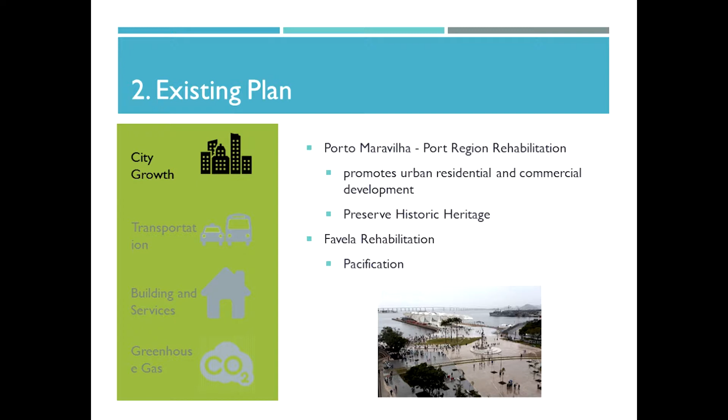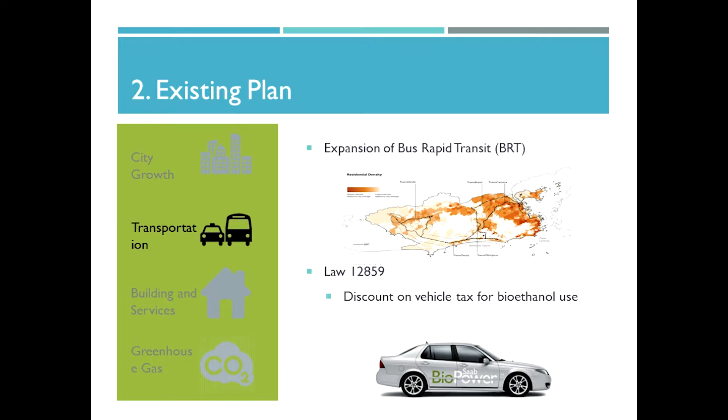In terms of transportation, there's an initiative for expanding the current Bus Rapid Transit, or BRT, system, providing greater connectivity citywide and offering a lower cost, more affordable way of public transit, along with Law 12859, which provides incentives for discounts on vehicle tax when they run on biofuel.

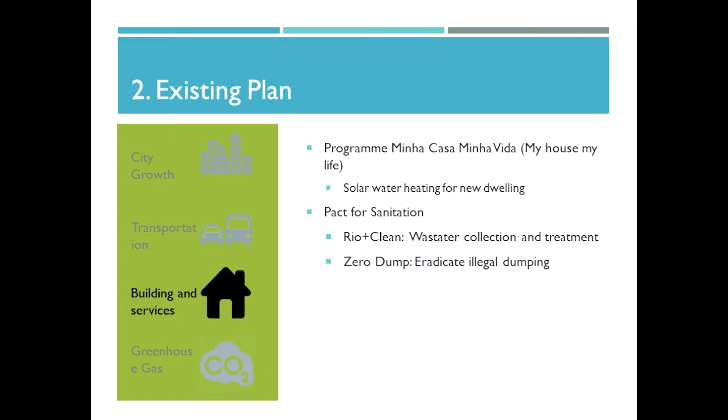In terms of buildings and services, by services I mean essential services such as water, wastewater, and solid waste collection. There's the initiative My House, My Life, which proposes solar water heating for new buildings, especially in favelas, and also Pact for Sanitation, including waste collection, along with eradicating illegal dumping of solid waste.

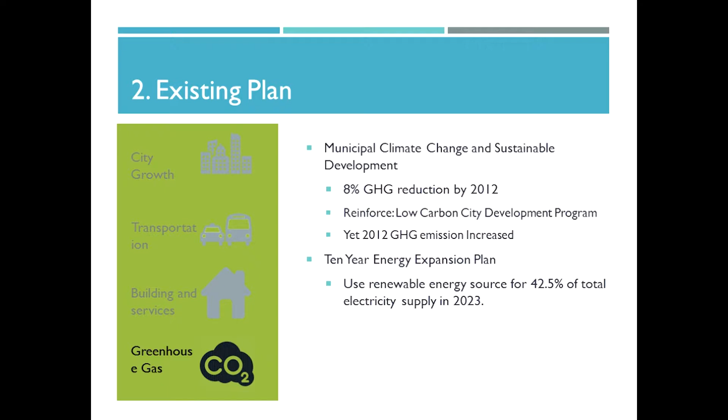Lastly, for GHG emissions, there's an initiative brought by the Municipal Climate Change and Sustainable Development policy, where an 8% GHG reduction was to be achieved by 2012. 2012 has passed, and we've seen an actual increase in GHG emissions, which doubts the effectiveness of this plan, along with the 10-year energy expansion plan, which signs agreements with renewable energy sources and developers.

Now it's our turn. We're going to talk a little bit more about our vision for 2050.

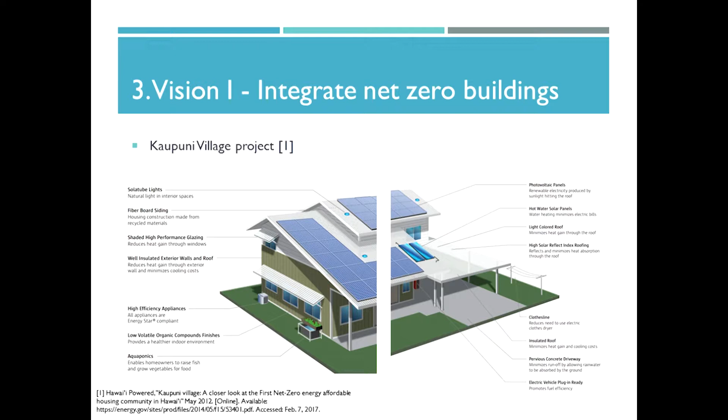Vision one is to integrate net zero buildings, inspired by Hawaii's first net zero building, which received LEED Platinum.

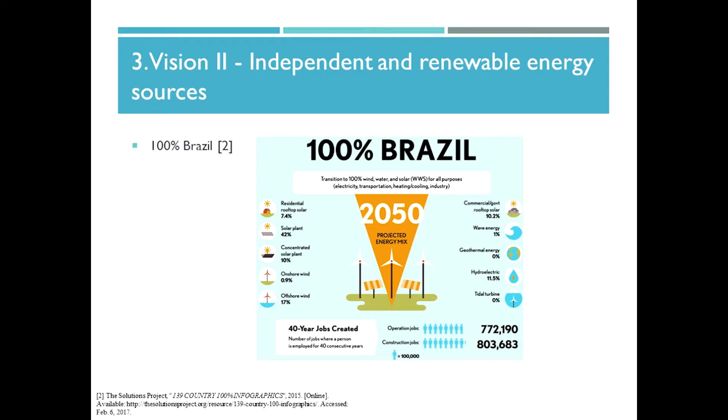The second is independent renewable energy sources, inspired by 100% Brazil, which transfers all energy supply systems to renewable. We're using this as inspiration, but we have our own renewable energy planning.

The third is full public transit coverage and mobility, as inspired by the car-free city concept in Chengdu, China.

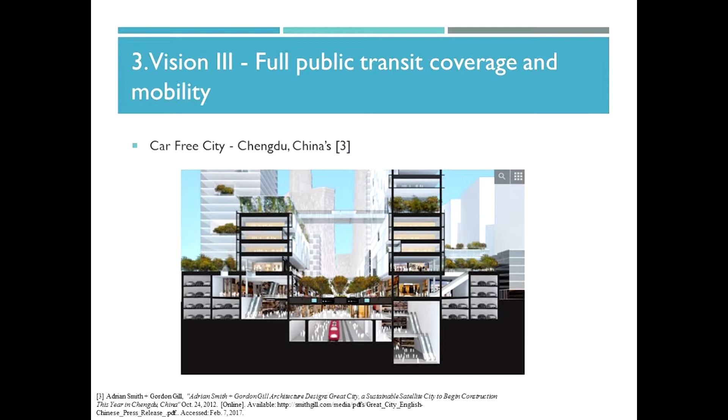And the last is to complete waste collection and treatment. So in order to justify our vision, we have infrastructure designs.

The first is the building design. We've proposed both retrofitting and new buildings for both favelas and urban formal developments. They're mostly similar, although there are some differences for retrofitting and new buildings in terms of appliances, which I'll dig into in more detail.

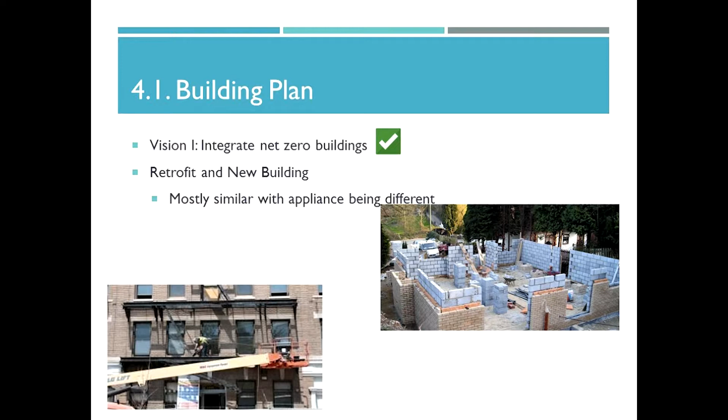We're going to start from top to bottom. In terms of roofing, formal developments will have ventilated building-integrated photovoltaic systems, or BIPV, which will achieve 70% electricity supply.

Those formal developments are often composed of high-rises, so that's where the 70% comes from. Informal developments, which are almost low to mid-rises, will also have BIPV systems that supply 100% of electricity for use, along with a lightweight green roof.

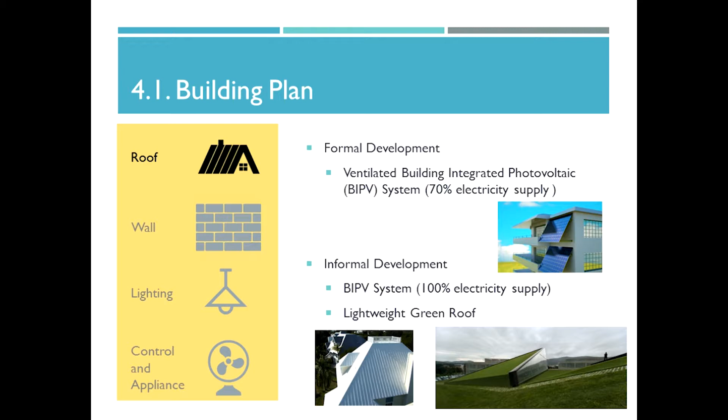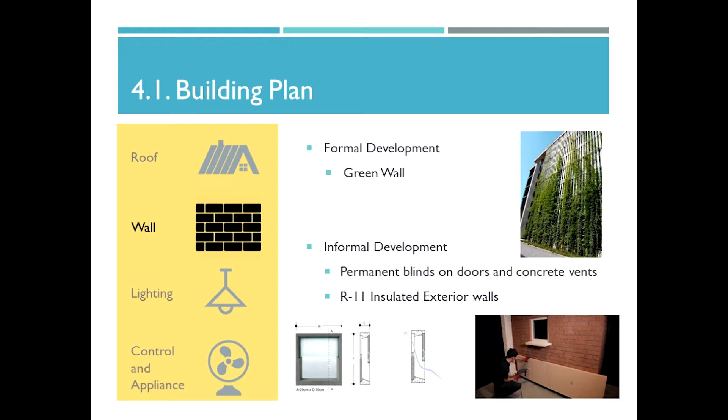In terms of walls, formal development will have green walls on the sides, along with informal development, which will have permanent blinds on doors and concrete vents, along with insulated exterior walls.

In terms of lighting, formal development will have external lighting shelves, which are adjustable, customized double glazed windows with adjustable blinds, and LED lights with sensors such as motion and sound. For informal settlements, we are going to propose Solatube lights.

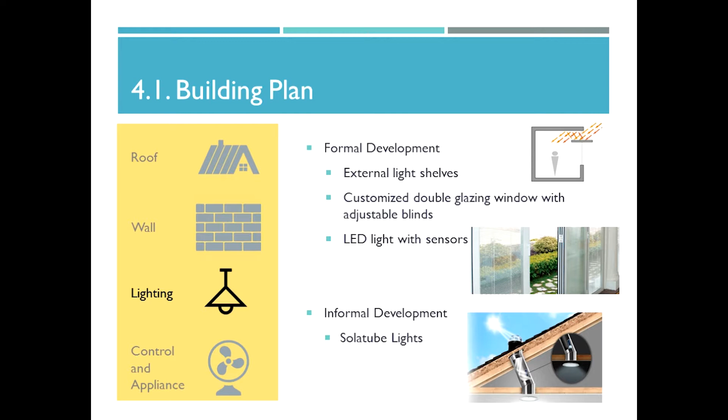For controls and appliances, in terms of climate control, there are some differences between retrofit and new buildings. The similarity is that the Nest Learning thermostat will be implemented for all, since even for retrofitting it's an easy replacement of your conventional thermostat. However, for retrofit it's a simple monitoring system using current appliances, whereas for new buildings, Energy Star appliances with smart control, timer, and electrical car charging system will be implemented.

We believe that if we plan to retrofit existing buildings with smart control appliances, those appliances already function well, so we don't want to generate waste. It's also going to be costly.

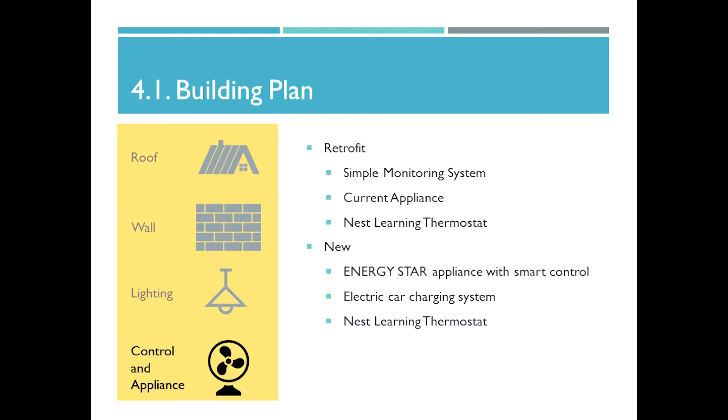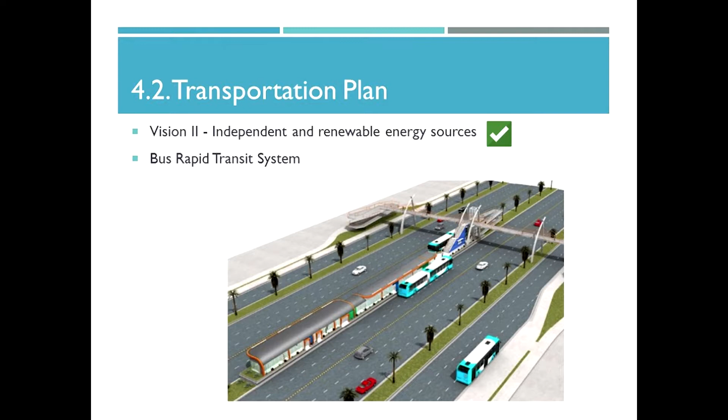Next, we'll dive into the transportation plan, where, as mentioned, the bus rapid transit (BRT) system will be more predominant for the city's public transit. This is the bird's eye view of a typical BRT system. We identified that this northern section does not have full connectivity, so we're proposing a BRT line across this section.

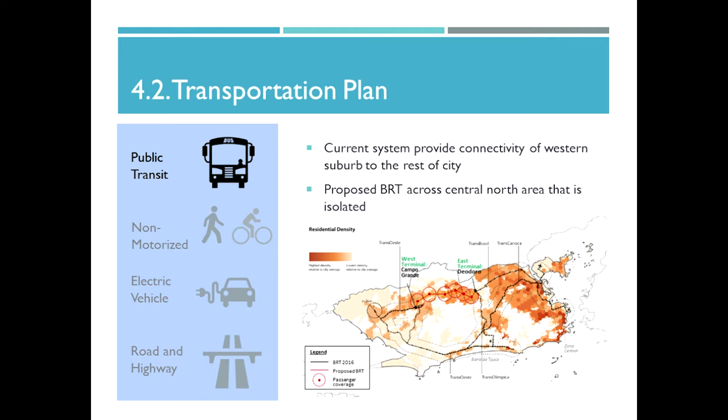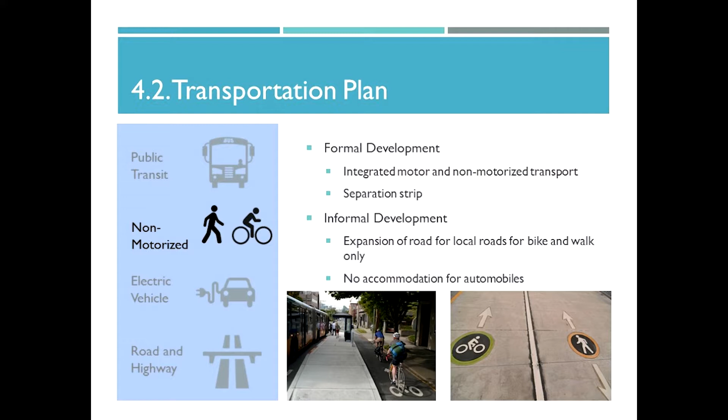In terms of non-motorized travel, which includes biking and walking, in formal development we will integrate motorized and non-motorized transport with the BRT system, along with a separation strip. For informal development, expansion of local roads in neighborhoods will be composed of bike and walking paths only. We'll talk more about this in the neighborhood design.

For cars, we propose that by 2050 all personal cars will be electric only. Several initiatives are being proposed to facilitate this transition: electric vehicle bylaws, where right now there are vehicle tax incentives for biofuels, now being applied to electric vehicles, along with special labeling, parking privileges, high occupancy vehicle lane access for green vehicles, and charging rebates.

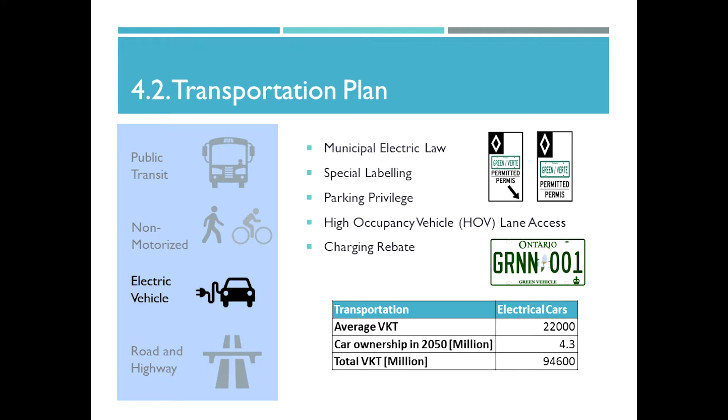We believe that with the implementation of HOV lanes, along with the connectivity we're offering through the BRT system, car ownership will decrease from 5.1 million to 4.3 million, whereas the total vehicle kilometers traveled (VKT) is 94,600 million.

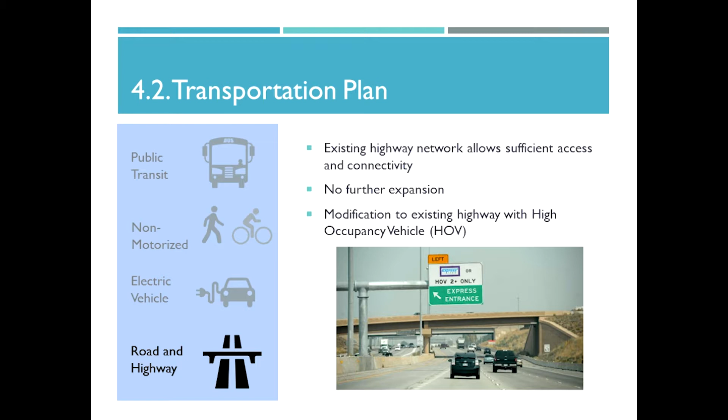In terms of roads and highways, we believe the current system allows sufficient access and connectivity for highway and local roads, so no further expansion is required, since we don't want to cause deforestation. But we do have some modifications for existing highways by implementing HOV lanes.

This will finish us off with the infrastructure design, starting with the energy plan.

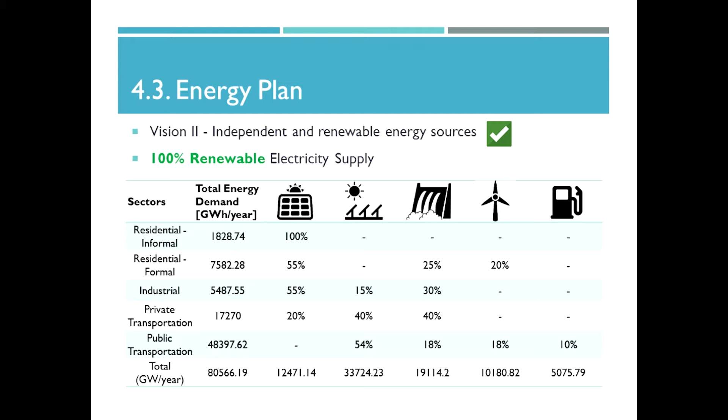For the energy sector, we are aiming to achieve 100% renewable electricity supply, achieved by implementing the PV system, solar microgrid, hydropower supply from the national grid, and offshore wind turbines. Now I'm going to talk in detail by sector.

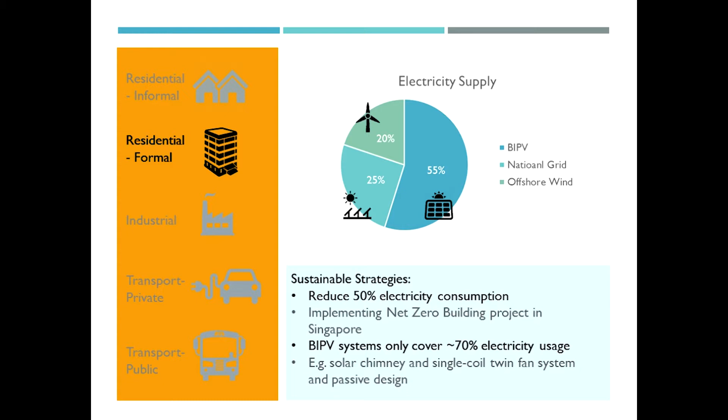For the residential sector, for informal houses, 100% will be supplied by the PV system. For formal houses, the high-rises, with our goal to reduce electricity consumption by 50%, we are going to use the PV system to cover 70% of the electricity supply, along with the solar microgrid. For high-rises along the coastline, we are going to use offshore wind turbines to supply electricity.

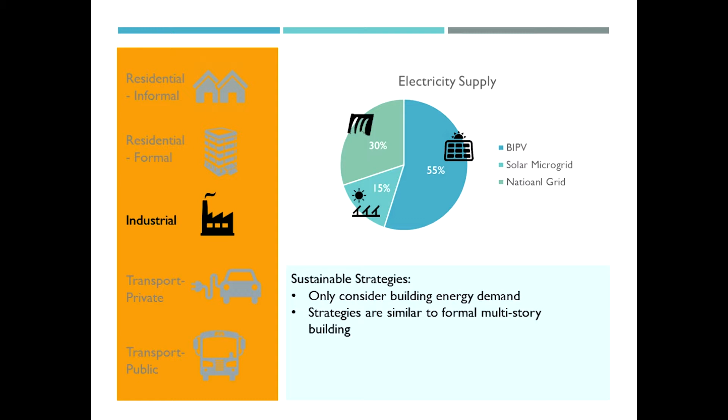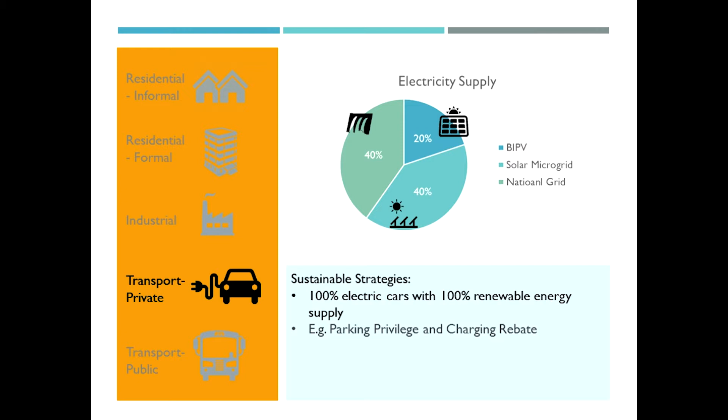For the industrial sector, we only focus on building electricity demand, with a strategy similar to our high-rises. For the private transportation sector, we are going to use a battery system, with charging stations at houses to supply electricity, and the rest will be equally supplied by the solar microgrid and hydropower. For the public transit system, about 55% will be supplied by the solar microgrid, installed around all BRT and subway terminals, with the rest supplied by hydropower as well as offshore wind turbines.

You may notice 10% of energy is supplied by diesel fuel. This is because our public transit demand increased significantly, so we had to introduce some conventional bi-articulated buses into our transportation plan.

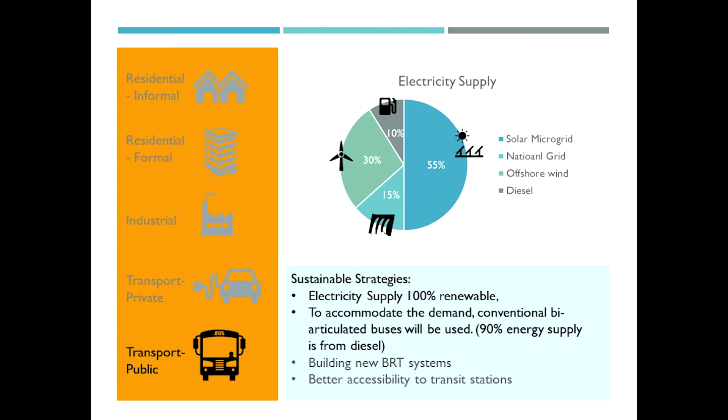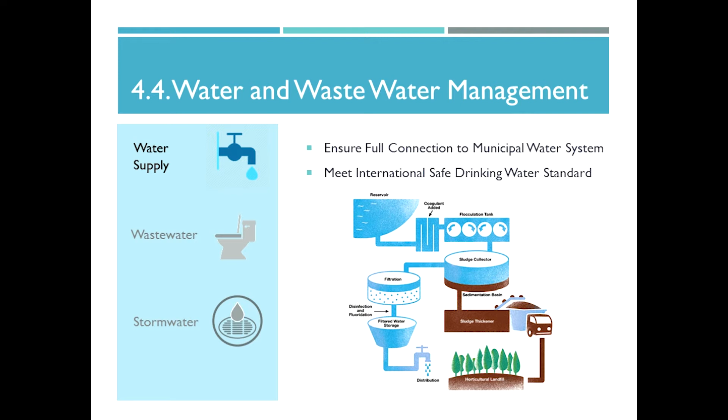Now I'm going to talk about the water and wastewater management plan. For water supply, we are going to ensure full connection to the municipal water system, especially for favelas, and also meet international drinking water standards. To achieve that, we are going to install conventional water treatment plants around the city.

For the wastewater plan, the first goal is to achieve full collection and treatment, which will be achieved by installing a gravity wastewater system that uses real geographic features.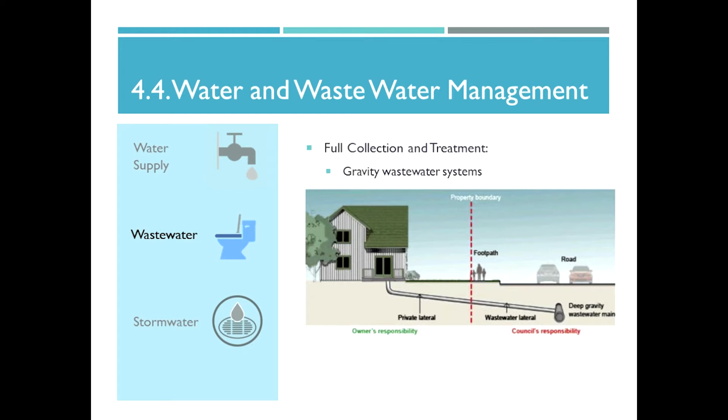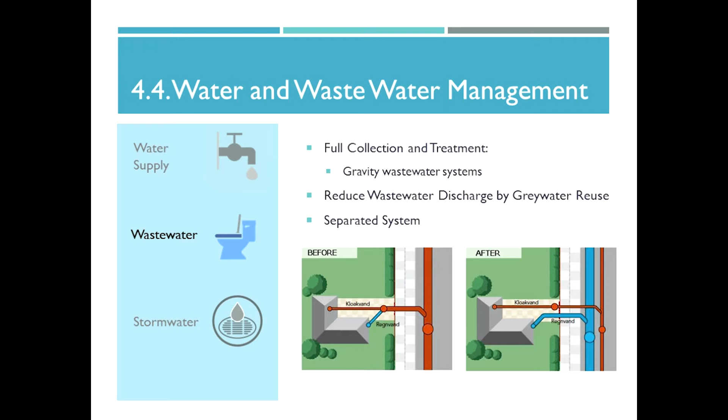We are also going to reduce wastewater discharge by installing greywater reuse systems for each household. And since the current system is a combined system, we are going to upgrade it to a separate system in order to separate sewer and stormwater discharge.

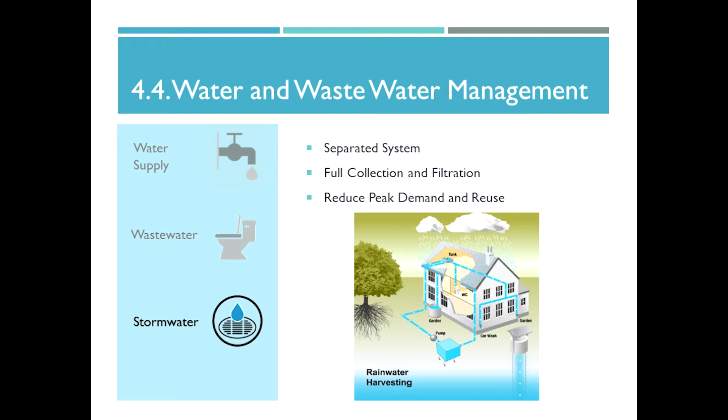For stormwater, other than the separated system, we are also going to do full collection and filtration. And in order to reduce peak demand during heavy rainfalls, we are going to introduce rainwater harvesting for all the low-rise and mid-rise buildings.

In terms of solid waste management, the first thing we are going to achieve is full collection. Especially for favelas, we are going to use our own innovative design. This is a normal garbage cart, but this is our design.

Normally it only has one opening, but with our design we allow residents in the household to separate their garbage into garbage, organic, and recycling. Then they can push their cart to the larger garbage bin.

We are also going to reduce landfill of solid waste by 50%. This is going to be achieved by 25% organic waste reuse, and also 25% recycling.

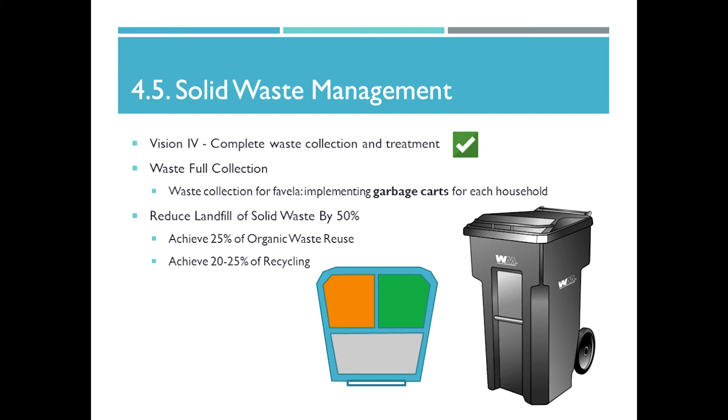For recycling, we are going to introduce an automatic sorting system at the treatment plant, but also push public education.

Now that you know about our infrastructure design, I'm going to talk about the land use and neighborhood design. For land use, we are going to follow the definition of a good city introduced by Kevin Lynch: open, accessible, decentralized, diverse, adaptable, and tolerant to experiment.

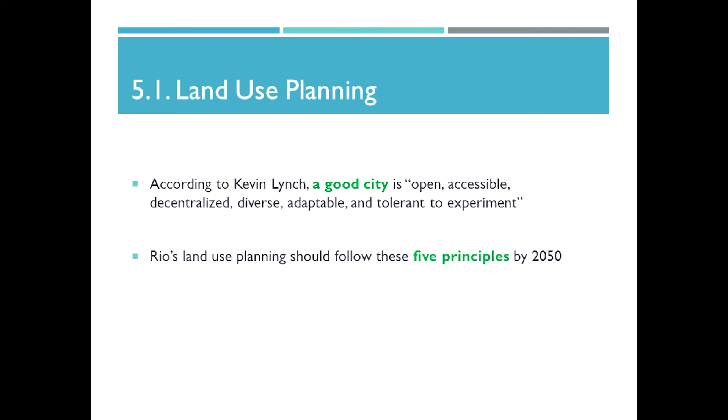This is going to be achieved by 5 principles. The first is to increase open spaces, achieved by setting a canopy coverage goal at 40%. The second is to encourage mixed land use, especially for the favelas.

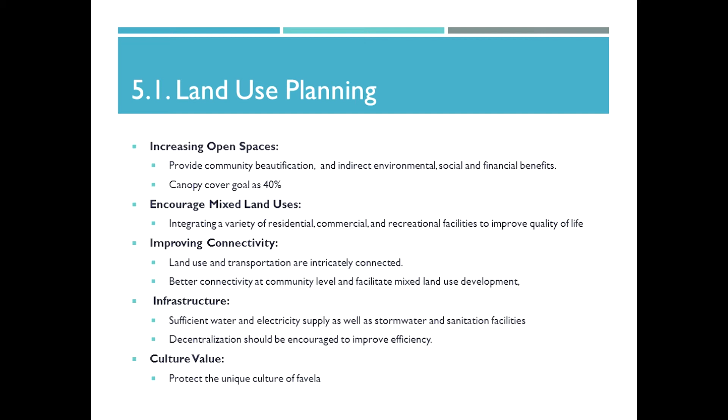We are also going to improve connectivity through our transportation plan and by providing sufficient infrastructure. The last principle is to protect the cultural value of Rio, especially protecting favelas, since they have become tourism attractions in recent years.

For neighborhood design in informal areas, in order to achieve our waste collection management plan, we are going to have 2 types of roads. The first is called the collector road, about 12 meters wide, allowing cars, trucks, bikes, and pedestrians to travel.

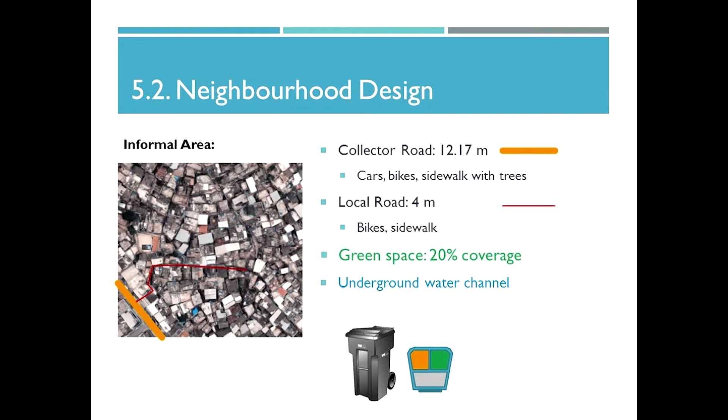The local roads will be widened to 4 meters, allowing bikes and pedestrians to travel. Green space coverage will be about 20%, and our stormwater management plan will be achieved by underground water channels. For the formal area, we also have roads.

For the collector road in the formal area, it will be about 30 meters wide, with a BRT in the middle of the cross section, and it can also be traveled by cars, bikes, and pedestrians. Our green space coverage goal is 40%, contributed by local parks and trees on the sidewalk.

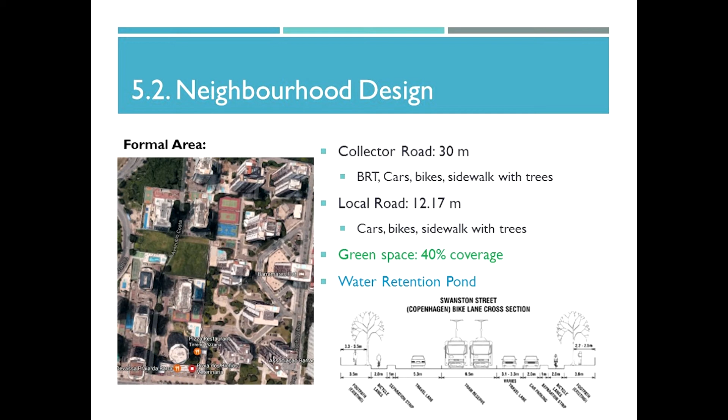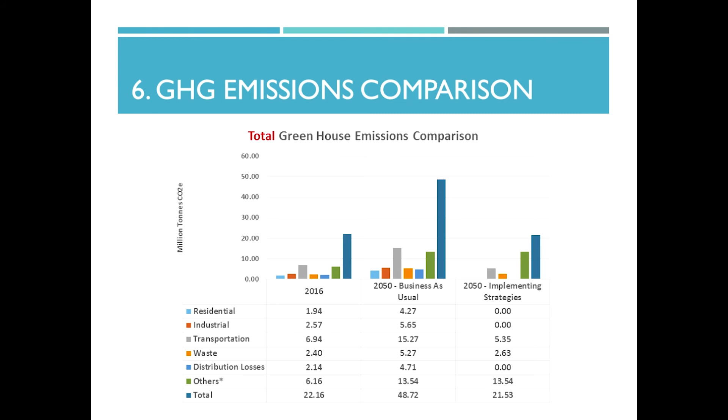This is achieved by zero emissions from residential and industrial areas, but I have to mention again, this is about electricity demand. For per capita emissions, you'll notice a decrease for each sector other than the other sectors, which are not included in our project.

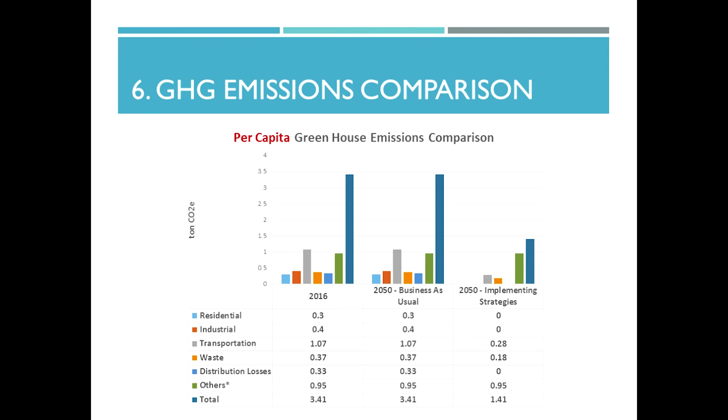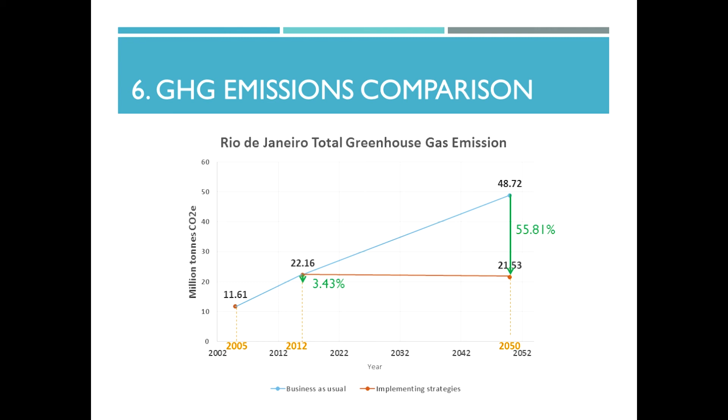As shown on this graph, you'll notice a 55% reduction from the business-as-usual case, and we can also achieve a 3.43% reduction from the 2012 greenhouse gas emissions.

In terms of urban metabolism, we are trying to achieve a closed loop material flow. Due to time constraints, I'm only going to show some of the features.

The first is that we are going to reduce fuel usage by only using diesel oil for the buses I mentioned before. The electricity demand will be hugely increased, but this allows us to reduce our greenhouse gas emissions by a lot.

For the Sustainable Development Goals, as you know already, we have a strong focus on resilience, so this allows us to achieve most of the goals, and we are confident we can achieve most of the 10 goals.

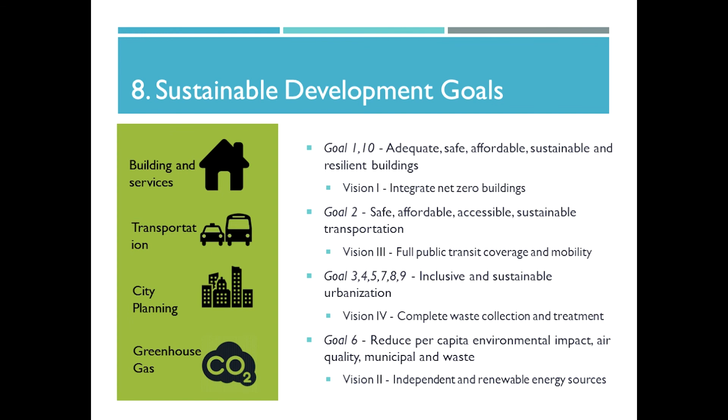This perfectly concludes our presentation because we are trying to increase environmental sustainability for the city of Rio. We also help the city improve its social and economic sustainability. Therefore, James and I hope our 2050 plan can help the city better serve its people by developing neighborhoods with healthy, vibrant, and safe environments.